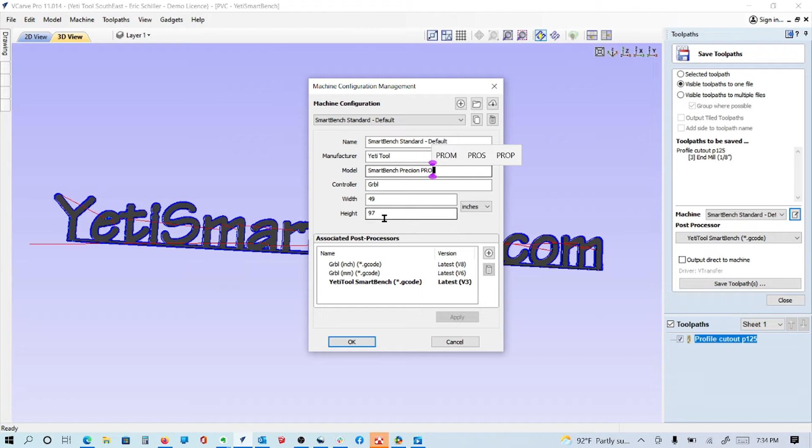It's the Yeti SmartBench. I have upgraded from older versions of VCarve Pro, so my setup may be a little different than yours, and I understand that, but it's going to be this same basic process. The manufacturer's Yeti tool, again, the terms don't really matter. Whether it's Precision, Precision Pro, Standard, any of the other new models, they're all using the same G code, and that post is called GRBL. And basically, it's a 49 by 97 inch envelope that we can work with, and then I'm going to use that, and off we go.

There is also a way to not have to look at all the post processors. If you open up the application data folder (File, Open Application Data Folder), you'll see all the post processors are saved here under PostP. And if we click on this, you'll see just a ton of them. But we can just grab the one that we want, and that's the Yeti SmartBench, and we're going to copy it, and we're going to put it here under My PostP.

And whatever we have here will be shown, and you could have multiples. And I have a video if you want to look, and I think I did this on a BSE machine. This was for a particular customer that has 2 machines. He wanted to be able to pick just between the 2 machines depending on where he wanted to send his job. But he didn't want to drop down the list of the hundreds of post processors. So whatever post processors he has under this My PostP, it will just show those two machines when we go to send them out here. But if you only have one machine, just set it up for the Yeti SmartBench and be done with it.

So at that point, we're going to save the toolpath. I like to save them to the job folder that job is in. So this is under Vectric, and then this is IWF 2022. And the way I name it, if we're going to send it to the SmartBench using Smart Transfer, which is Yeti's app that really is a very simplistic way of sending your G-code files over Wi-Fi to the console, I like to name it YSB for Yeti SmartBench, IWF, and then profile cut out. YSB IWF for the job name, pocketing or whatever. Because if we just use the default file names that's based on what the operation was, this was a profile cutout, they'll all be stacked up together if I have them named a little differently.

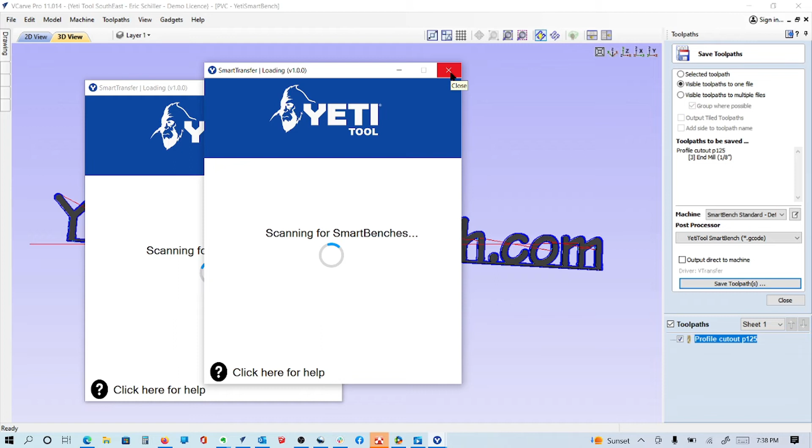And I would just drag the file and drop it right here, and it'd be at the console before I can get up. You can still use FileZilla or any other remote transfer program. You can copy to a USB drive and bring it over. Whatever is your preference. But the question that a brand new customer had is, how do I get there? How do I select post processors and save it? So all good. And before I get away, let's show how to set up the toolpaths. I copy files from all over.

I changed from English to metric, so I have no idea what a toolpath or my tool database is going to look like, because I use test databases too. So this said let's take 26 passes. There's no need for that, so we're going to edit that.

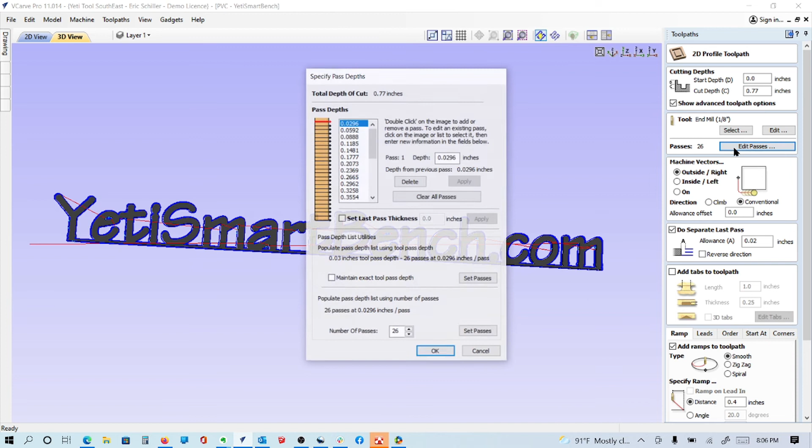I can edit just the number of passes right here. If I just edit the number of passes, I can tell it that's 3/4 material I'm doing. So let's say I want 7 passes, 7 1/8-inch deep passes. If I set that, basically it's 0.11. Well, 0.125 is an 1/8 inch. That's the diameter of the tool.

Yeti has some published guides for cutting, and they would say use the radius of the tool. So they would be looking at more like 15 or 16 passes.

But this is PVC, it melts, so it cuts like butter. So personally, I would set it up, having tested it and know how it works. I'd do 7 passes, and it would knock out. But that's just changing the number of passes. Next time I use this tool to cut other things that are this thick, it's going to do the same thing.

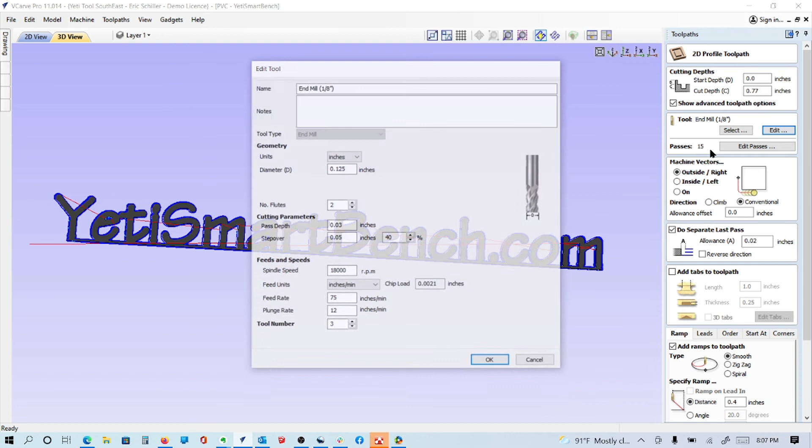It's going to default back to what was in the tool database. So we can go over here and edit the tool database. Now this is editing it at the database level. We told it to only go 0.03 inches per pass for the depth. That's in the tool database. So I'm going to back up and show you where that is.

So we're going to go to Toolpaths, tool database. That'll take a second to open up, and that was an 1/8 inch end mill. And there's the issue, it was only looking at 0.03 deep. Well, that's not much at all.

So let's set it for 0.0625, so 1/16th, the radius of the bit. And then that's a nice safe bet, depending on the material. I can play with this and have it different depths of cut and step downs and things like that based on the material here, but I'm just going to leave it here. So I'm going to set it at 0.0625.

And the step over is based on 40% of the bit. That's fine if I was pocketing something out. So that's fine. So if I apply that, it'll save that to the database.

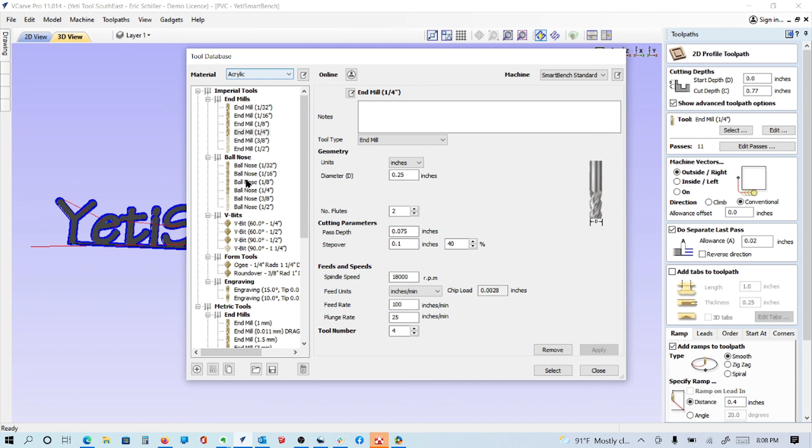And then if I were to select a different tool, I'm just going to select something. And that tool needs to be modified too. I don't need 11 passes with a 1/4 inch tool. So I'm going to select something again, and I'm still in acrylic, and I'll go grab that 1/8 inch, and there's a good setup using the radius of the bit. That's 13 passes. I know this is PVC, I can do this in 7 easily.

I'll set the passes, and okay. So that's how we do it.

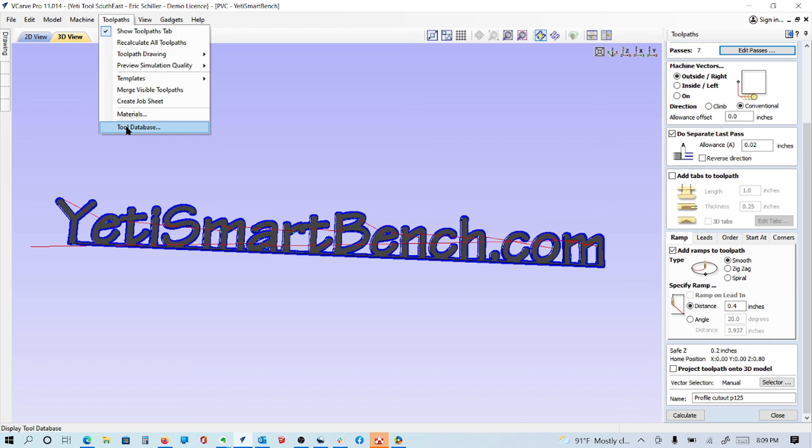There's plenty of videos on setting toolpaths and depths and doing your database, but that's particularly for a certain customer that asked how to do it. You want to go into your database and set that up appropriately. Set it up by default for the radius of the bit for each of the depths of cut. But just know, depending on the materials, you can adjust the radius of the bit.

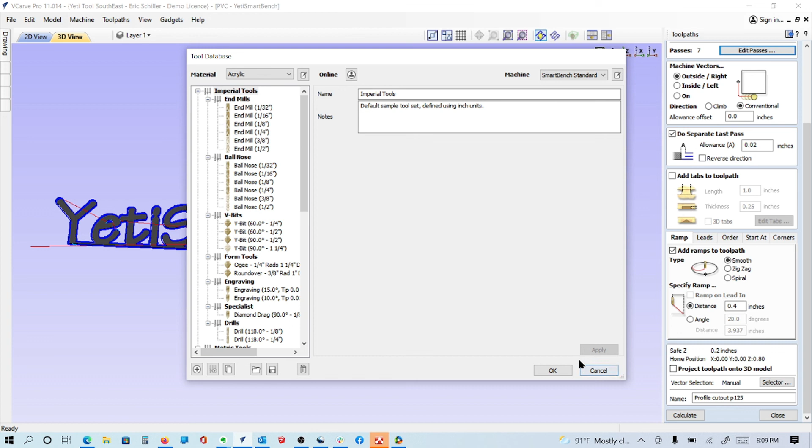There are some customers using an 1/8 inch compression spiral, cutting through 3/4 inch material. They're just slowing down their speeds, and they're getting great results, and it's cutting down their overall machine time. So there's all kinds of tooling strategies. That wasn't the point of this video. The point of this video was to show how to save it and get that output out.